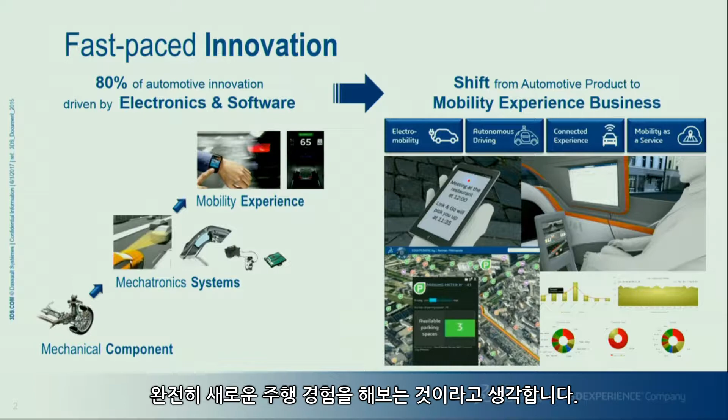Now let's come back to the overall challenge of this sector. I don't think consumers are expecting more features in their cars brought by electronics and software. I think consumers, like you and me, are expecting a total change in terms of the experience you get going from point A to point B in the future vehicle, in a smart city or elsewhere.

So to achieve that, traditional car makers like Hyundai, Toyota, General Motors, Ford, will have to change. They will have to transform if they want to stay competitive.

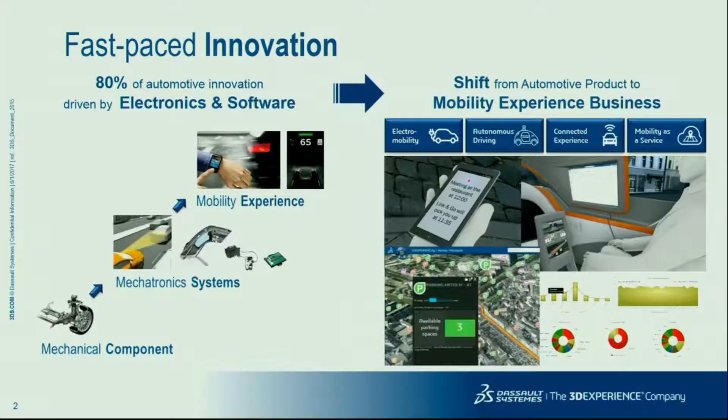I try to watch on a daily basis the trends, what is being said in different events and articles about autonomous cars, electric cars, shared mobility. And what I've learned is that there's a brand new industry ecosystem, made of traditional car makers but also brand new players coming from the high-tech industry. Think about Tesla, Faraday, NIO, Rimac.

These new companies are thinking in a totally different way. And by the way, you know what? We are lucky because they are all using our platform. And I will try to explain why they selected the platform to achieve their goal.

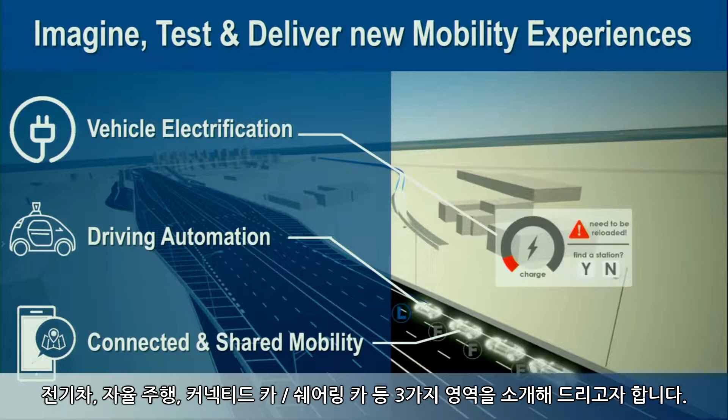Now let me show you three different things that demonstrate the value brought by the platform. Here I would like to address three simple themes: vehicle electrification, driving automation, connected and shared mobility.

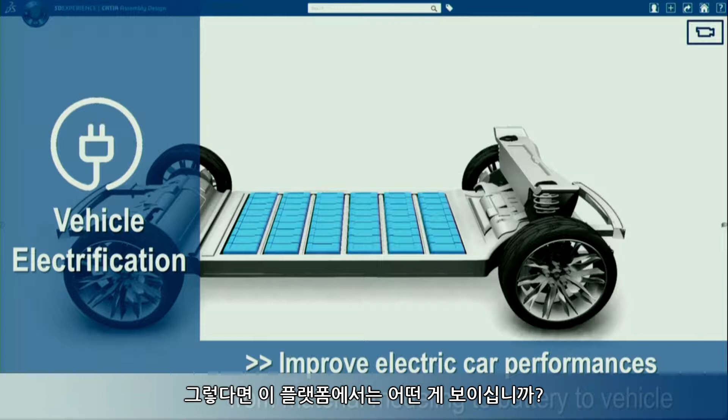What do you see here on the screen? You see a platform, right? Now what do you see in this platform? What is different in this platform compared to the previous platform? The battery. Actually, battery development is really, at the moment, the bottleneck of what makes the electric vehicle efficient. So if we want to be successful in the future, we have to improve the way we develop batteries.

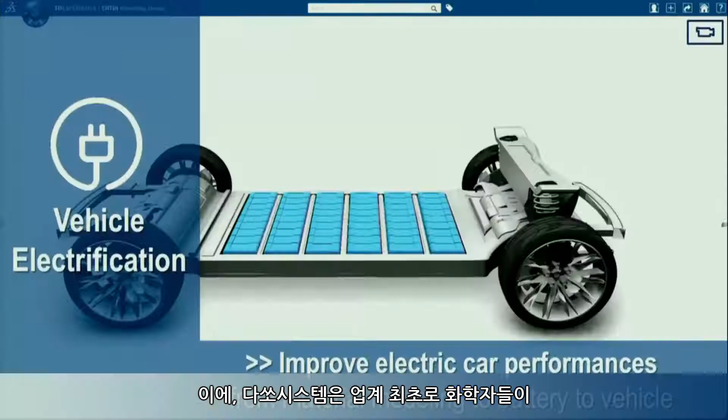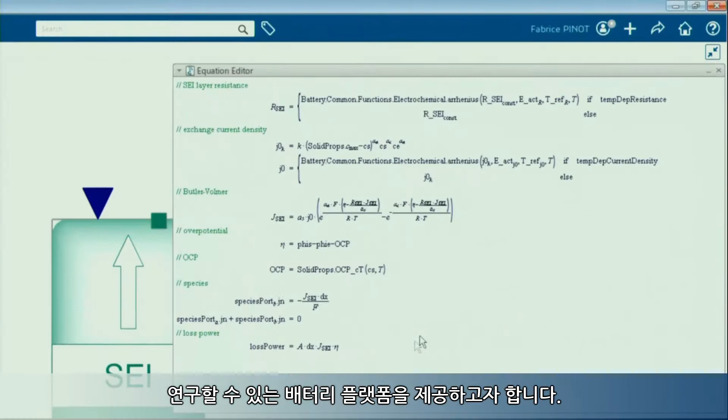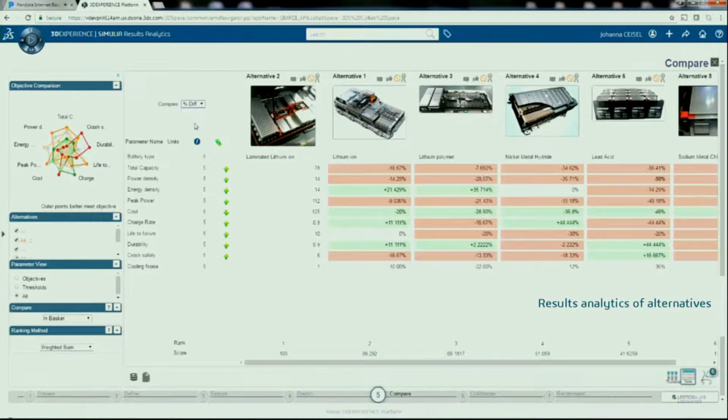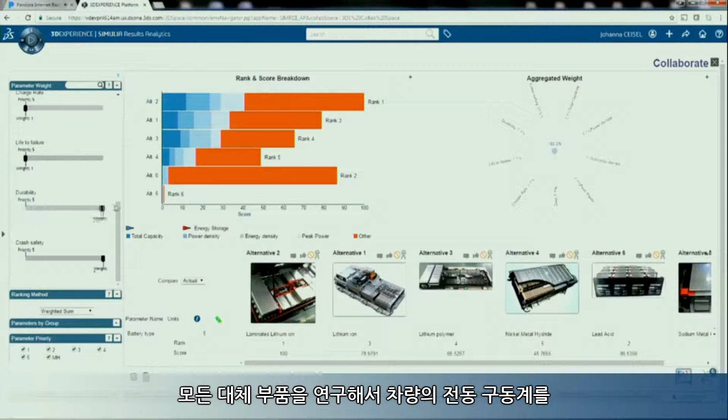Now at Dassault Systèmes, we want to be the first to provide a platform to make sure that chemists can study material behavior and the way the material will behave at nanoscale within the battery cell. Also, we want simulation analysts to test all the different thermal analysis in the battery pack. And finally, we want vehicle engineers to look at the overall vehicle and study every single alternative in order to take the right decision for the complete vehicle electric powertrain optimization.

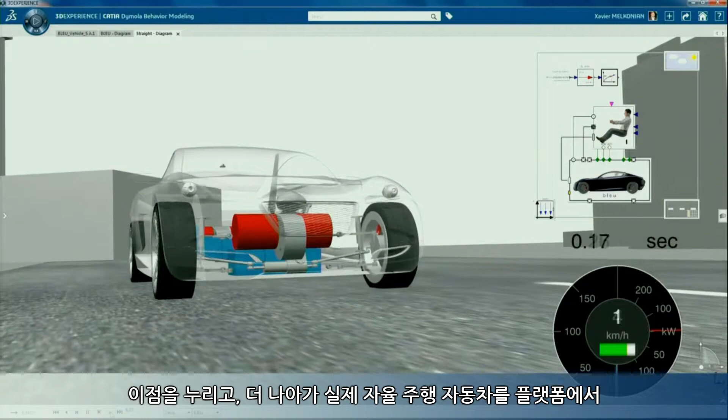And there is big value out of it: reduce lead time, reduce cost, make the right decision, find the right solution, and at the end, simulate virtual, real, autonomous car driving in the same platform.

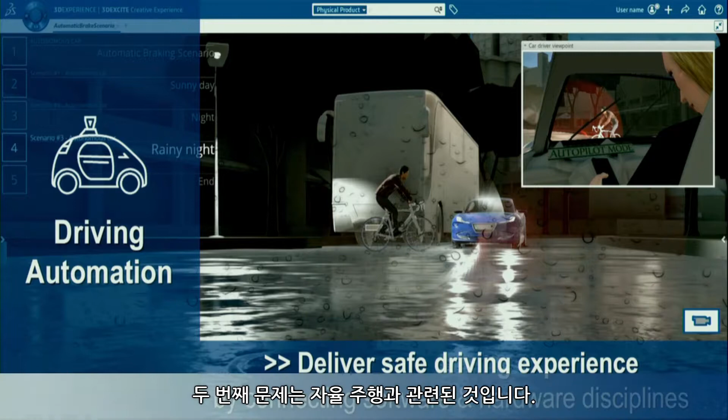The second challenge is about autonomous driving. You all experience in your car every day more and more advanced driver assistance systems. But in the future, we don't even know if we're going to drive the car ourselves. I hope we do, but maybe we don't get driving licenses anymore.

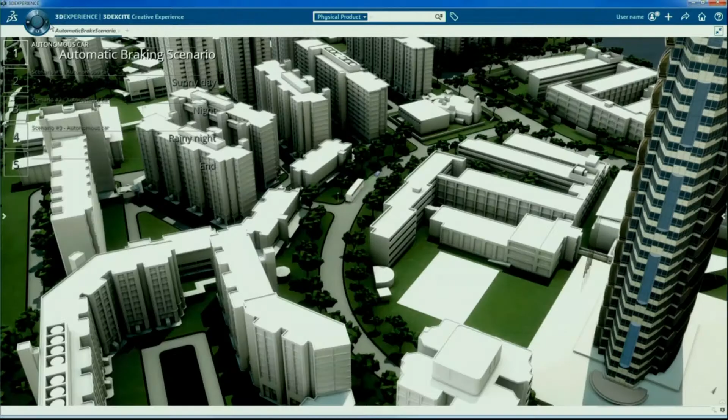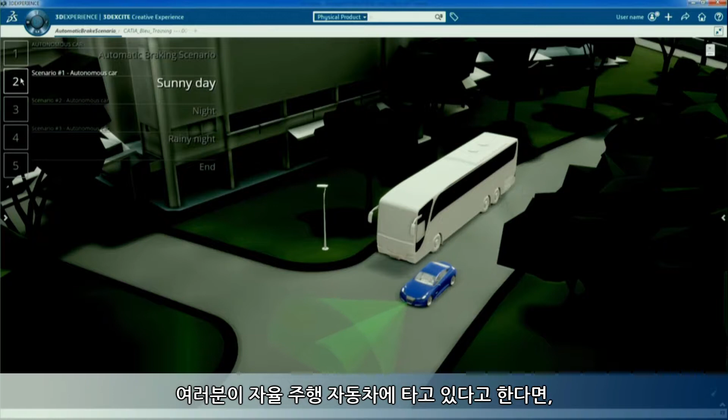So what do we want to achieve here? We want to make sure first that we imagine what the scenario will be - what it takes if you're going to drive, or just be in an autonomous car, and want to make sure that every single scenario is safe: avoiding cyclists, avoiding pedestrians, emergency braking distance. All these different cases need to be carefully analyzed. So you need to imagine the scenario.

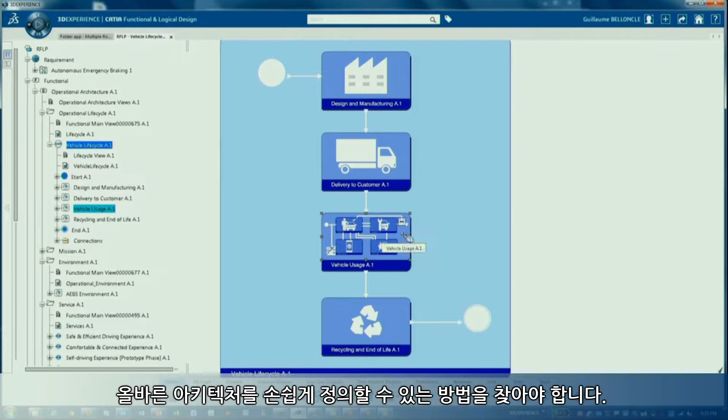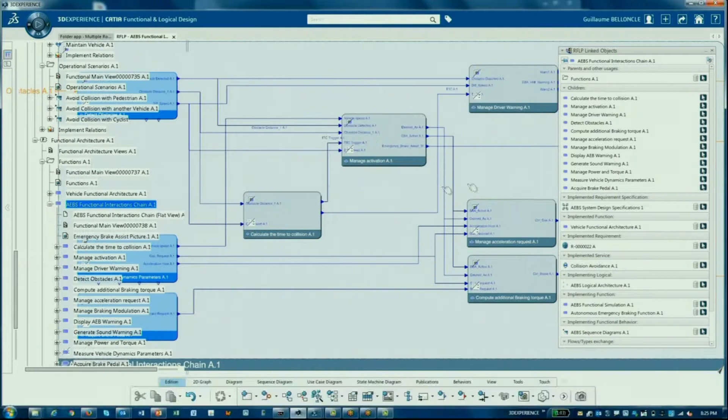You need to capitalize on all the different requirements, and you need to make sure that you can easily define the right architecture for every single requirement. Architecture is key. In the very early phase of development, this is where engineers define the complete vehicle. This is where you can master the cost of what it will take to actually develop the full vehicle.

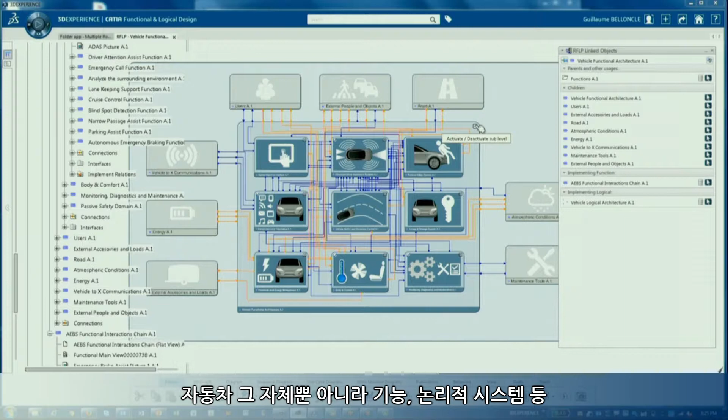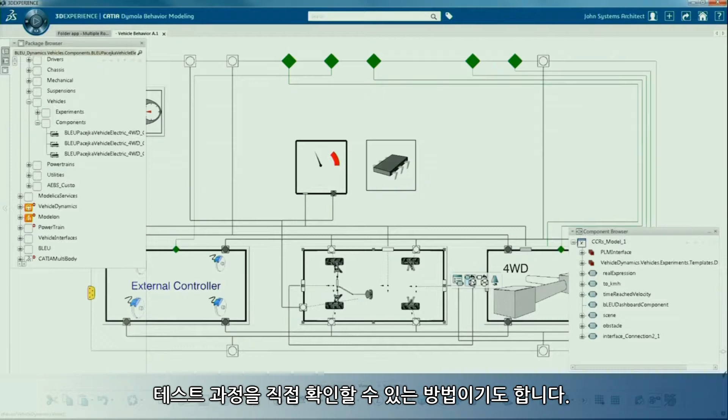So today we want to propose an approach whereby you can define the full architecture of your cars - not only the physical car itself, but the functions, the logical systems - to make sure that you can simulate every single situation in the virtual world. This is what we propose to engineers in order to fully make virtual tests in the platform. And you see this test in action.

Topic number 3 is about connected and shared mobility, because this transformation will be a lot about data. Engineers need data. If they don't get data, feedback, they don't learn about what's going wrong.

So today there is a limited number of test data that they can get, but in the future they will be able to access many data from connected cars. And so they will know exactly, for every single car, what the different issues are, how much they can learn about the issue, what the different test cases are, and it will be a fantastic way to improve current car development. So we think big data, connected car data analytics is going to be key for us.

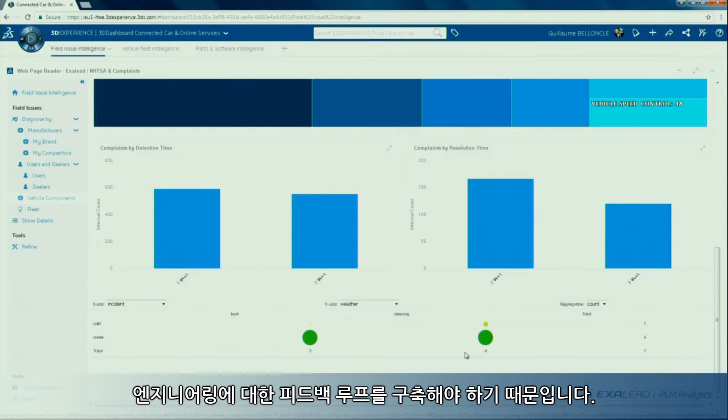And why do we want this integrated in the platform? Because we want to make sure there is a feedback loop towards engineering. And by the way, this kind of big data analytics is going to happen also together with smart cities.

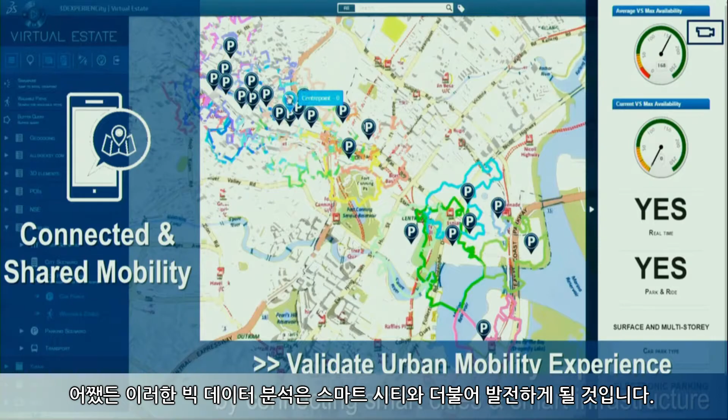Smart cities, in the same way we do a digital mock-up of a vehicle, will need to have a digital mock-up of the city. And not only that, but they want to be able to visualize mobility data in the context of the city - in this case, parking.

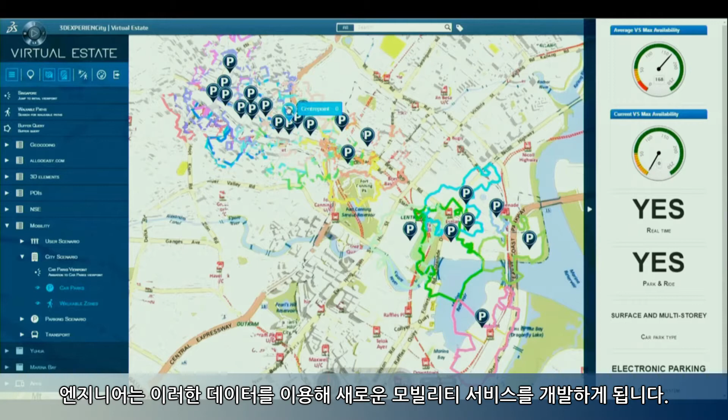If you have autonomous cars driving into the city, you want to be able to master every kind of data, including parking, and potentially engineers will use this data to invent new mobility services. And this is why, again, we want this to happen in a common platform.

So the conclusion is that what we want to propose here is to imagine what the storyboard of the new experience for the vehicle will be. Make sure we have complete multi-physics, multi-scale simulation, because at the end we want to certify the vehicle.

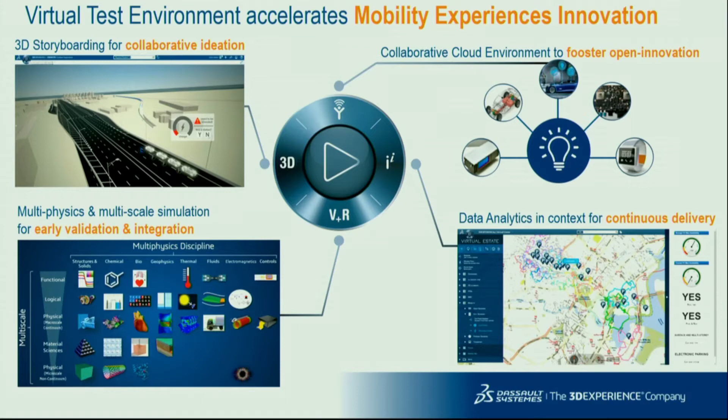Make sure we can master data to learn about every single case, feed it back to engineering, and also enable collaboration - not only facilitating exchange within your own company, but also potentially partnering with brand new companies in your ecosystem, not only traditional auto companies, but people coming from the world of high-tech or internet. That will be the real power of the platform here.